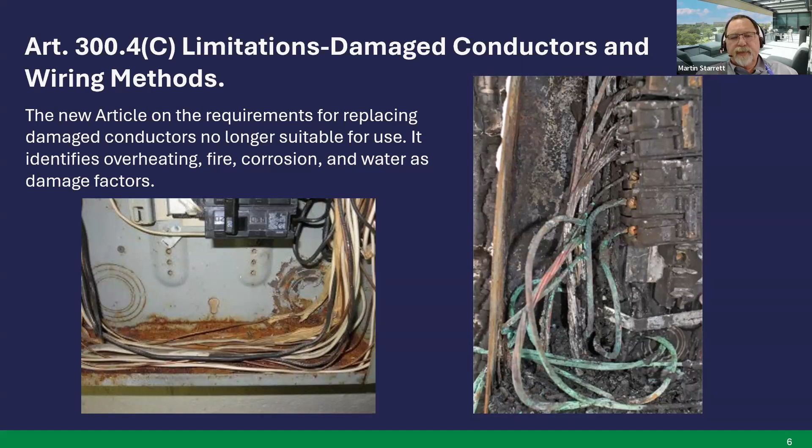Article 300.6E, protection against physical damage, wiring methods, material in or under roof decking. The revision has added all types of roof decking, not just metal corrugated. Those of you familiar with the 23 code or 20 code know that you have to maintain an inch and a half below a metal corrugated roof. Now in the 26, it'll be all types of roof decking, such as a residential. You have plywood. You'll have to keep those raceways an inch and a half below that.

There is a new exception for electrical wiring encased in at least 2 inches of concrete in concealed locations. And also there's always the exception for rigid and intermediate metal conduit. That still is in the 2026. Next slide.

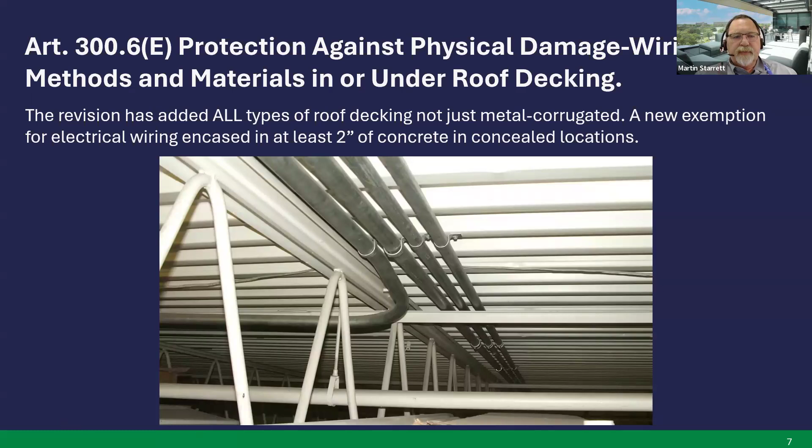Article 300.7D3, underground installations, protection from damage, service conductors, and raceway. The revised article now includes service conductors in raceways. As you know, the current 2023 and previous versions only talked about service cables. You had to put the warning ribbon above these ditches that had these service conductors. Now in 2026, if the service conductors are installed in a raceway, even then you're going to have to use that warning ribbon. Next slide.

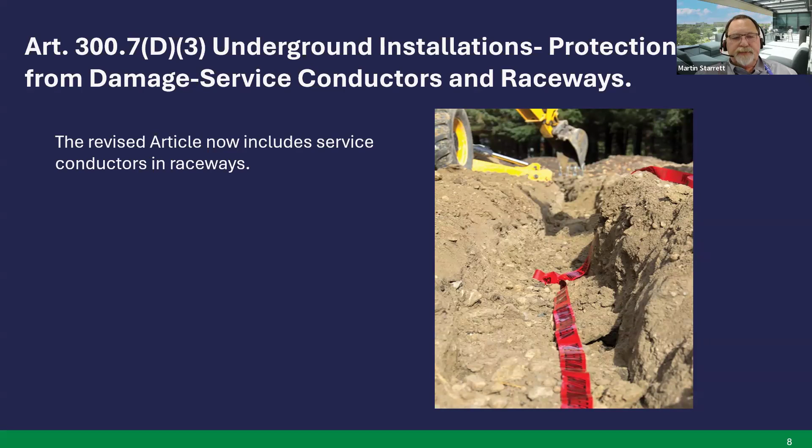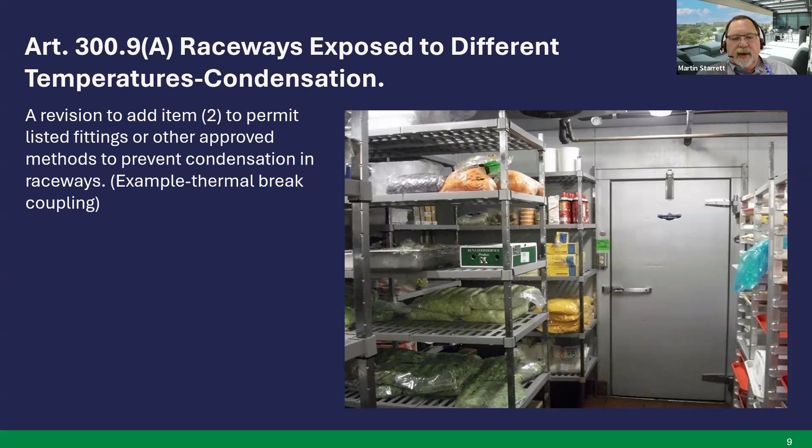Article 300.9A, raceways exposed to different temperatures, condensation. Revision to add item number 2 to permit listed fittings or other approved methods to prevent condensation in raceways. An example of what they've added would be something like a thermal break coupling. Typically, whenever you go from a cold temperature to a hot temperature, in the 23, you had to seal that. But now they've actually added another method in these thermal break couplings. Next slide.

Article 300.11B, raceways and wet locations above grade drainage. A new article requiring raceways to drain when installed in a wet location above grade. This would be interior and exterior. So if you have a wet location on the inside of a building, those raceways will have to be installed so they can drain. Next slide.

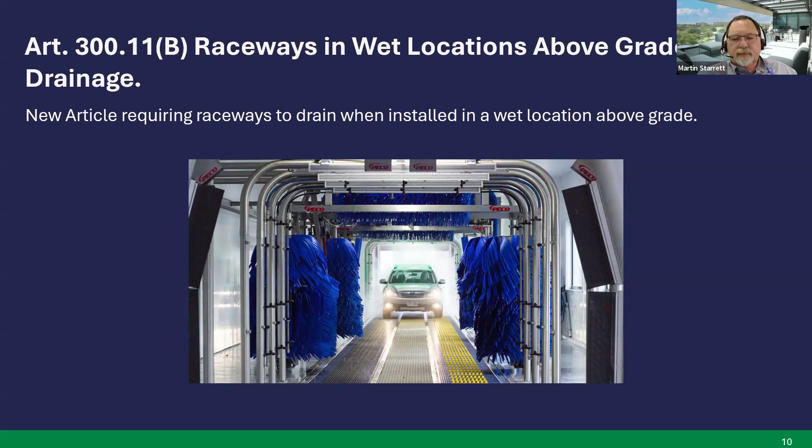Okay, this is kind of not a big one, but you're really going to have to pay attention, those of you that use cable ties for securing and supporting. So Article 300.13E, securing and supporting: the new subdivision and informational note utilize the new terms for cable ties and cable tie fixing device. If you were with me in chapter 1, those were new definitions added to Article 100.

So whenever you read this article, it tells you that the cable ties, if you're using them for cables and raceways, will have to be listed for securing and supporting. If you notice, I've got 3 different types of cable ties here. There's type 21S. That's only good for securing.

Type 21S, excuse me, the first one is 21S. That should be type 21. It's only good for securing. The middle one, type 21S, is for securing and supporting. And then, of course, you've got type AH2, plenum rated.

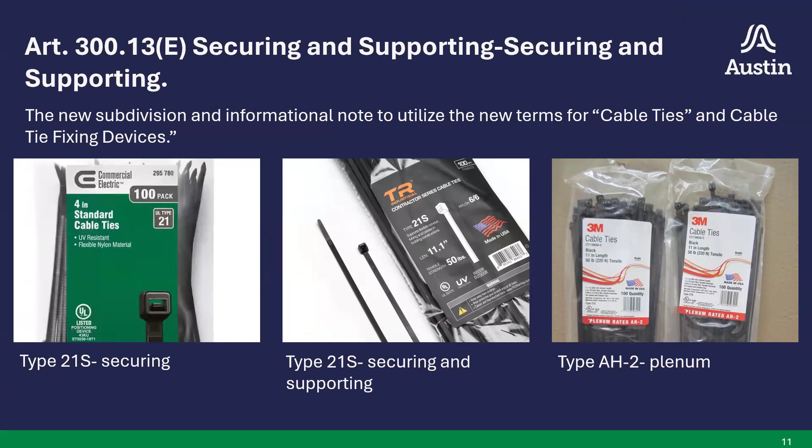Give me 1 second. I think we're having an audio issue here. Let me see if that helps. Hopefully that'll help. Marty, I think you're all right. I was just checking with the audience, and I think this may be just unique to one participant. Oh, good. You sound good to me. I was seeing chats come through. That's why I was asking.

Anyway, what I'm trying to tell you with this new article is, if you use cable ties for securing and supporting, you're really going to have to watch what you purchase. You're going to have to pay attention to the listing. As we've already talked about in the last 2 sessions, there's a lot more listing requirements in the 2026 code. Next slide.

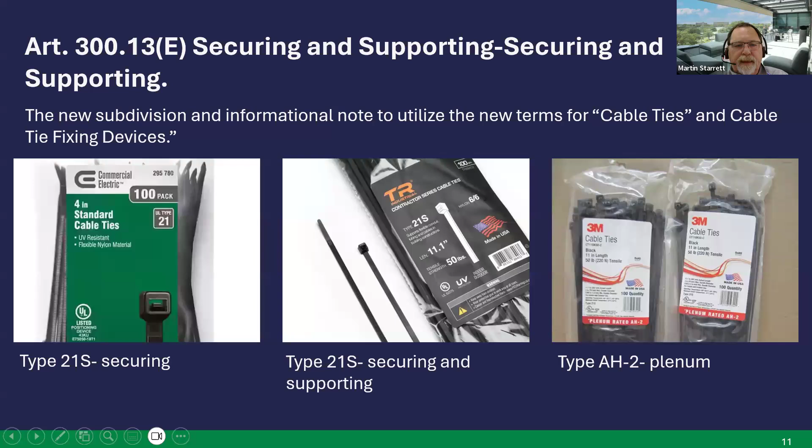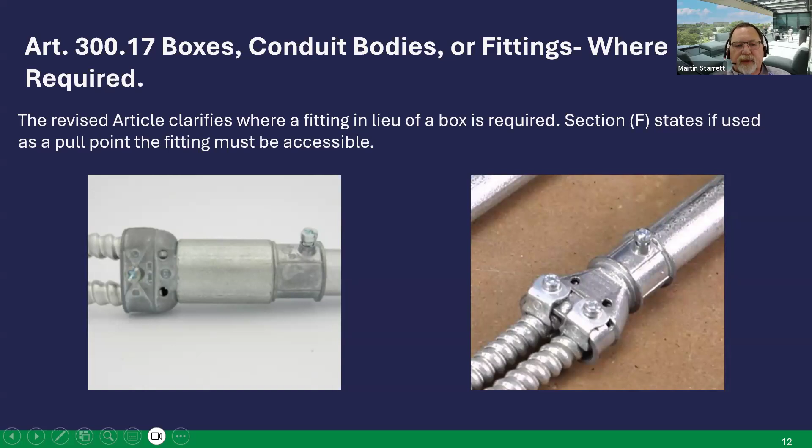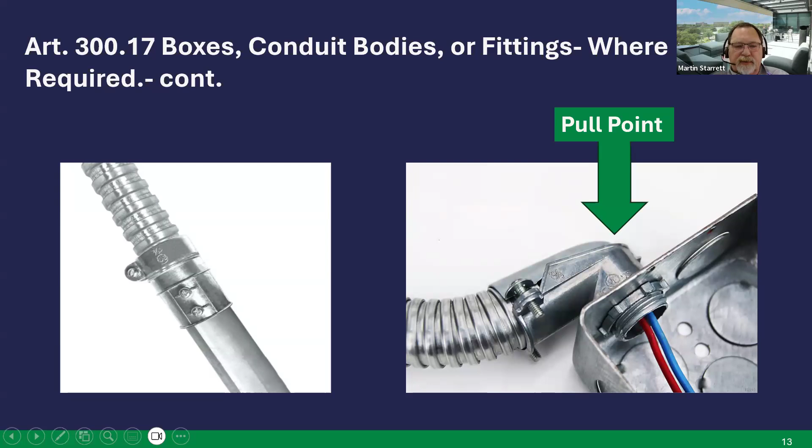So if you have a pull point in a raceway, you've got to have access to it. Like the one on the right, that 90-degree flex fitting, that's going to have to be accessible. The one on the left, since there's no pull point, you will not have to have accessibility to that fitting. Next slide.

Article 300.20(B), raceway installations, welding. The revision clarifies that welding of electrical raceways is not allowed. To be honest with you, you weren't allowed to do it for years, but apparently there was a little note in there that if an engineer could determine that it could be done, you could do that. But they specifically clarify it now. You cannot weld raceways at all. Can't even weld them as a support method. Next slide.

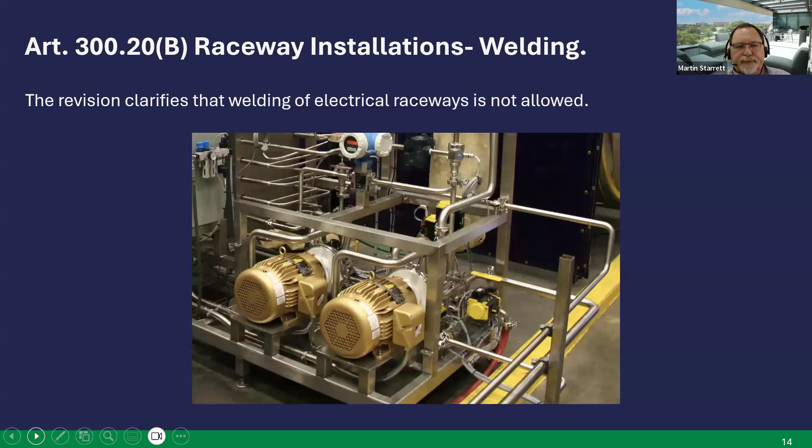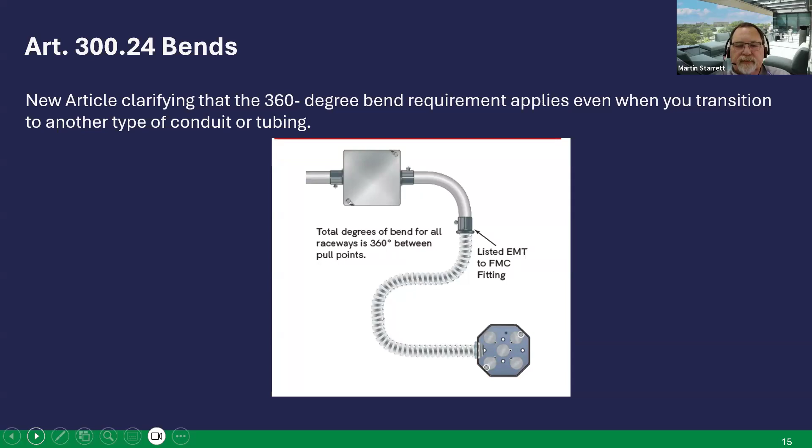Article 300.24, bends. The new article clarifies that the 360-degree bend requirement applies even when you transition to another type of conduit or tubing. So you'll really have to watch this if you go from EMT to flexible metallic conduit. You'll have to look at your bends. You will not be able to have more than 360 degrees between two boxes. Next slide.

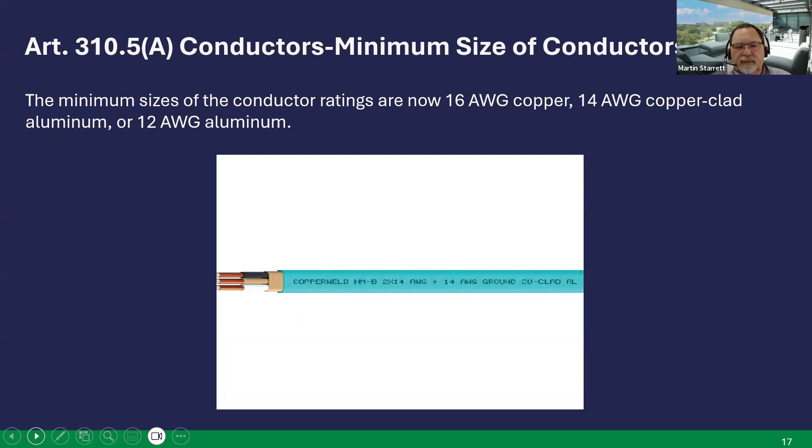All right, now we're going to get into Article 310. That's conductors for general wiring. So Article 310.5A, conductors, minimum size of conductors. We have a new minimum size now in the National Electrical Code. It'll be 16 copper. If you were with me on Friday, we talked about that 10 amp branch circuit; you'll be able to use that 16 copper or the 14 gauge copper clad aluminum for those types of circuits. Next slide.

Article 310.14(A)(2), ampacities for conductors rated 0 volts to 2000 volts, general selection of ampacities. The exception to this article has been rewritten as a list and clarified. It now clearly states that the higher ampacity can only be used when differences are caused by ambient temperature or the number of current carrying conductors. The part of the circuit with the lower ampacity still cannot be longer than 10 feet or 10% of the total circuit length.

So most of you are familiar with doing ampacity when you do adjustments. If you've got a certain section that's in an ambient temperature area, or there's more than 3 current carrying conductors, typically you would have to do those adjustments along the entire length of the circuit. But if that particular area where that occurs is not longer than 10 feet or 10% of the total circuit length, then you don't have to do the ambient temperatures for the whole circuit.

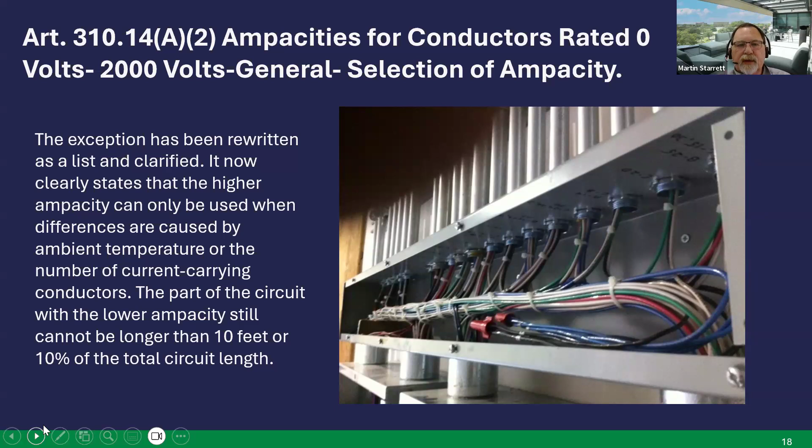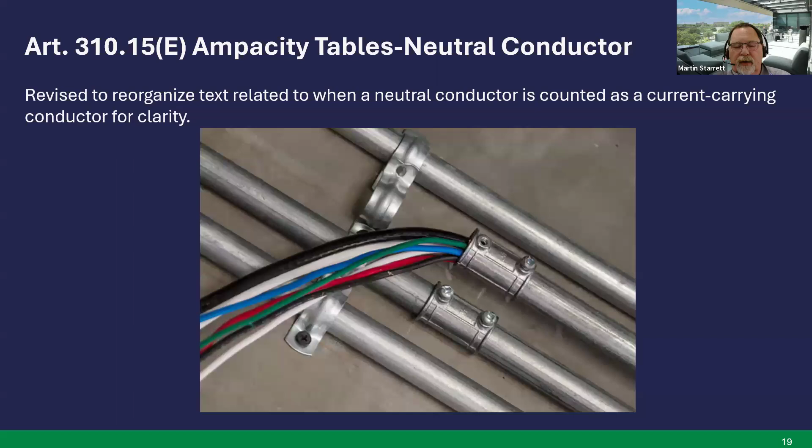Article 310.15(E), ampacity tables, neutral conductor. They revised it to reorganize the text related to when a neutral conductor is counted as a current carrying conductor for clarity. I'll be honest with you, this new revision has clarified it for me. I know throughout the years I've always had a little issue with this particular article, but now the 2026 is going to make it easier to understand. Good code change.

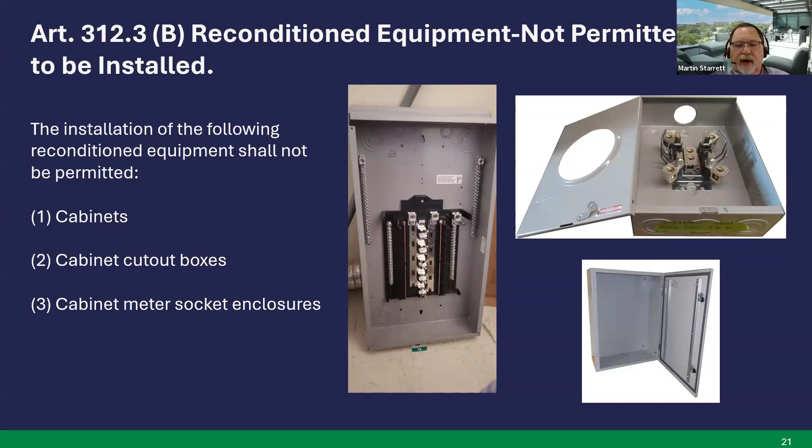Article 312, cabinets, cutout boxes, and meter socket enclosures. Next slide. Article 312.3(B), reconditioned equipment not permitted to be installed. As we've been talking the last two sessions, that .3 is your reconditioned equipment, pretty much in every article that has that requirement. This one says that you're not permitted to use reconditioned cabinets, cutout boxes, or meter socket enclosures. Next slide.

Article 312.11(A), splices, taps, and feed-through conductors. This is a big change if you do a lot of these generator installations on existing dwellings. I know because of the way it works out on some of these houses, you have to put in the transfer switch for the entire house generator for protection.

You've been able to run the load side conductors off of the meter through the existing panel to the new service rated transfer switch, but you cannot do that in 2026 because the revision, service conductors are to be located within service equipment, was added to the required conditions. So you will not be able to run those service conductors through that existing panel in the 2026.

You will have to reconfigure your installation to go from the meter over to the transfer switch, and then from the transfer switch back to the existing panel. So you really have to watch that if you do this type of installation. Next slide.

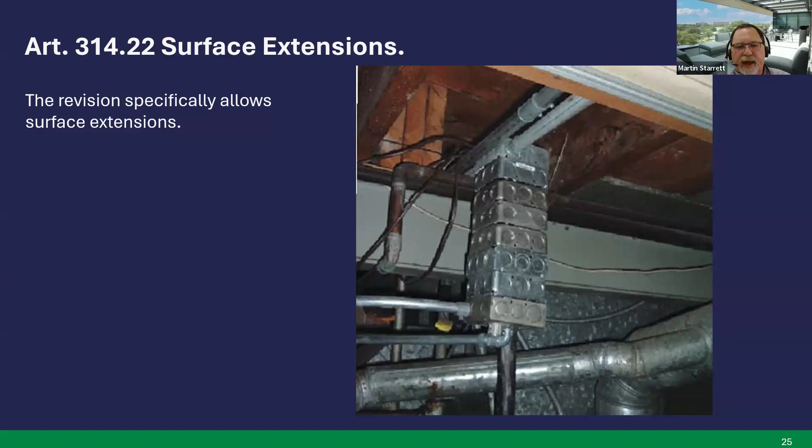I think this is a pretty good one myself. 314.23(E), supports for boxes and conduit bodies. This one here is raceway supported enclosures without devices or luminaires. So it'd be like if you had a junction box with no receptacles or lights attached to it. The revised exception added FS or FD single gang box or explosionproof box to what is allowed to be supported by a single raceway.

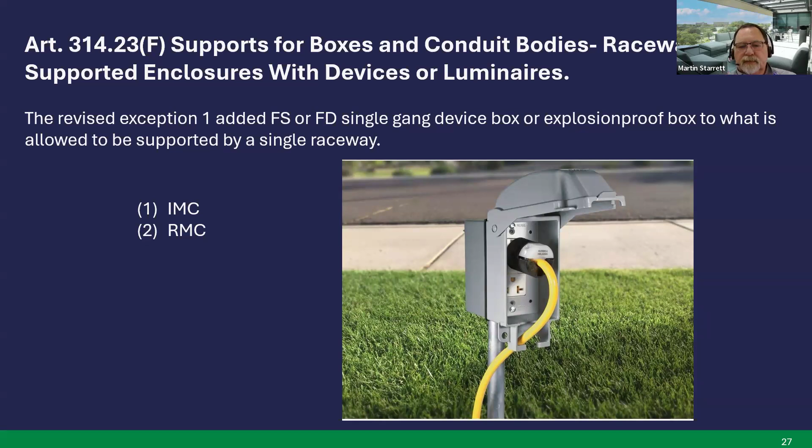This is my most favorite code change of 2026. As inspector, the current code requirements, well, it wasn't difficult to enforce, but it was kind of one of those things like, oh man, I hate doing this. I hate failing people for it. But now we've got it clarified and it's exactly the way it needs to be to me.

Article 314.27(B)(2), boxes at ceiling suspended paddle fan outlets. The new required locations for ceiling fan boxes is either one, centrally in ceilings of living and sleeping areas, or two, at locations where indicated by the installer, designer, or building owner. If you were not familiar with what's currently in the code, the ceiling fan boxes are required in habitable rooms where you could put a ceiling fan.

What that means is if I've got a kitchen, if I've got lights over a kitchen island, even those are places that typically you would not see a ceiling fan, but current code, I'd have to put a ceiling fan rated box in those areas. The new 2026 code, I think it gets it right. You're just going to be putting these boxes in the living and sleeping area. That's where most people have their fans in a dwelling unit. Or hey, if the owner wants to put a fan in the dining room, then you would have to have a box there, but not every box in every room of a house.

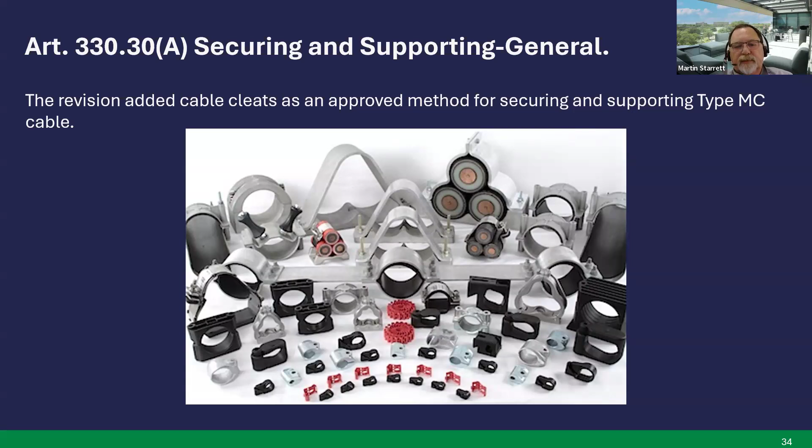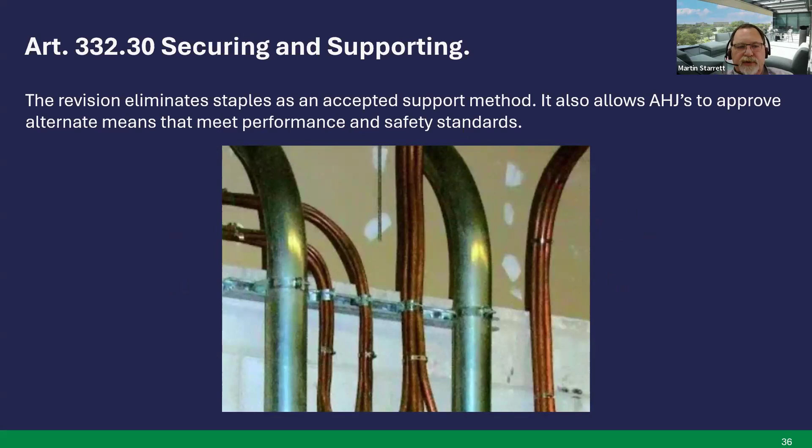Article 332, mineral insulated metal sheathed cable type MI. Next slide. For securing and supporting, Article 332.30, the revision eliminates staples as an accepted support method. It also allows the AHJs to approve alternate means that meet performance and safety standards. So you will not be able to use staples to support MI cable.

Article 334, non-metallic sheath cable types NM and NMC. Next slide. Article 334.10, uses permitted. The revision added an exception to allow NM cable to be installed without the 15-minute thermal barrier in non-habitable grade level storage garages and buildings under 1,500 square feet. I will say electricians will need to watch that.

You cannot put NM cable where areas are subject to physical damage. Sometimes these little garages, for tool storage or tools, they might actually damage the cable. But the new code, you do not have to have the 15-minute thermal barrier. Next slide.

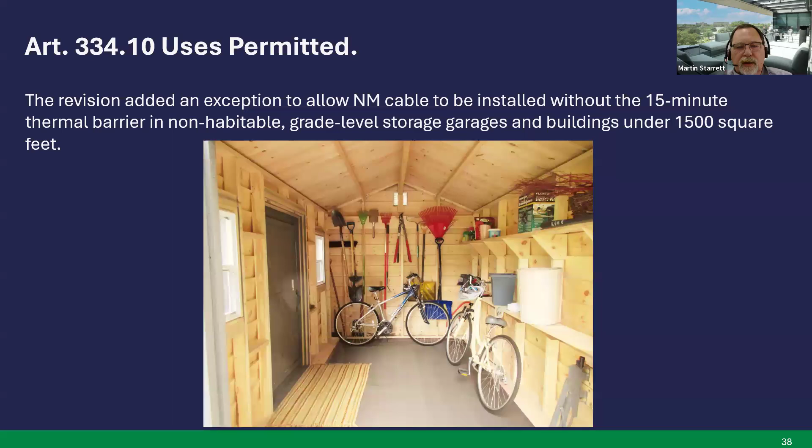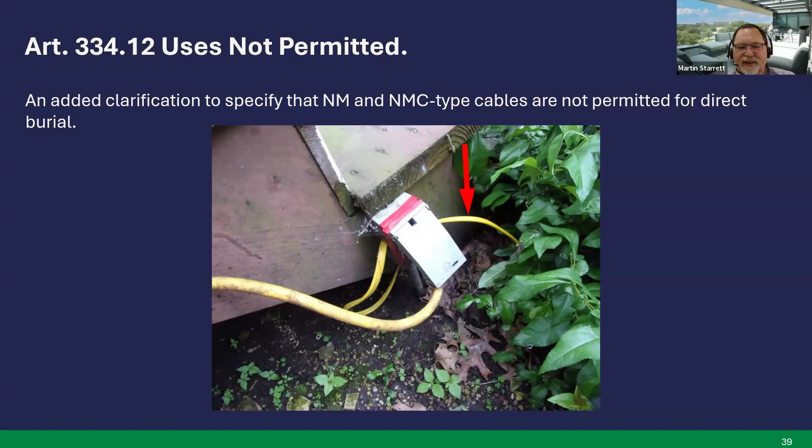Article 334.12, uses not permitted. They added a clarification to specify that NM and NMC type cables are not permitted for direct burial. I always thought this for years, but I guess it wasn't ever really specified in the code. There were probably some little discussions amongst installers and inspectors, and so they actually put it in the code. It says you cannot direct bury NM or NMC type cables. No digging Romex underground. Next slide.

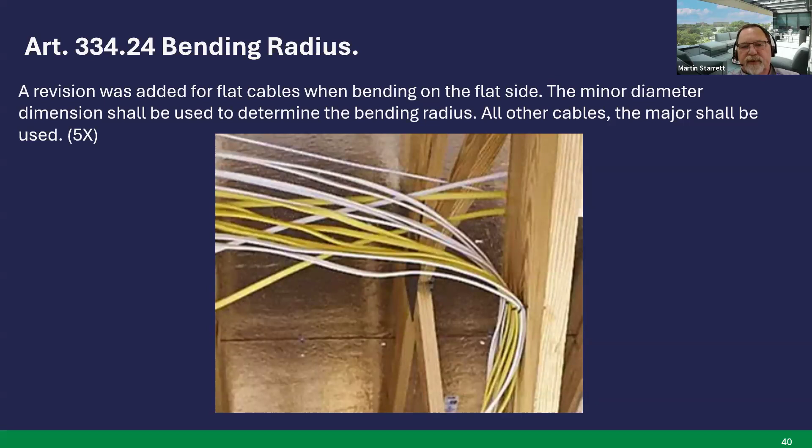A few changes to the bending radius, 334.24. A revision was added for flat cables when bending on the flat side. The minor diameter dimension shall be used to determine the bending radius. All other cables, the major shall be used. If you do not know, the bending radius on a Romex is 5 times the diameter of the cable. So they give you a little bit more bending radius on the flat cables than on a non-flat cable. Next slide.

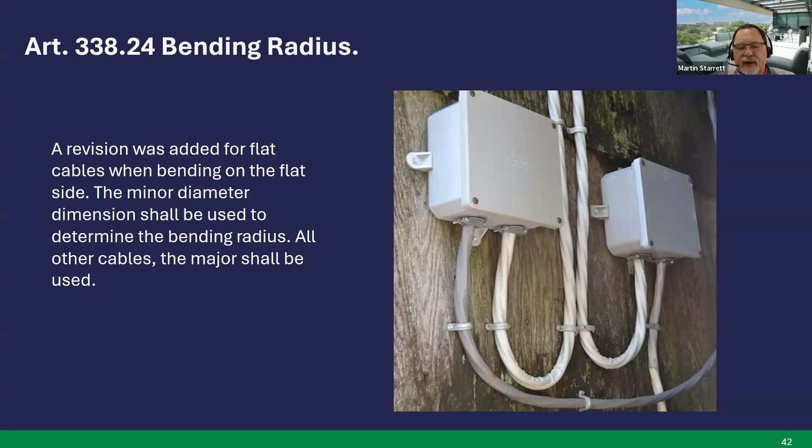Article 338, service entrance cable. This will be types SE and USE. Next slide. Same thing, just as just discussed in the NM and NMC article, same thing in the SE and USE article. The revision to 338.24 bending radius was added for flat cables. The minor diameter dimension shall be used to determine the bending radius. All other cables, the major shall be used. Again, 5 times the diameter size of the cable. Next slide.

Article 342, intermediate metal conduit, IMC. Next slide. 342.10(B), uses permitted, corrosive environments. A new informational note was included to provide examples of corrosion protected wiring methods. These two are galvanized steel and PVC coated steel. Next slide.

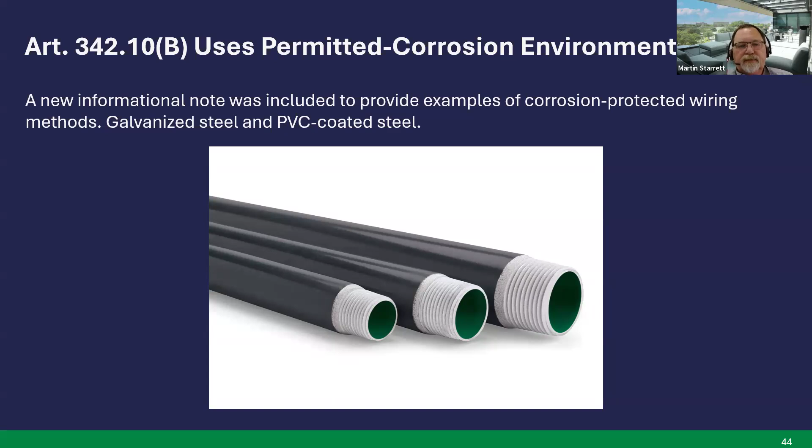Article 342.14, dissimilar metals. This is the same article that's also in rigid metal conduit, 344.14. I'm kind of doing two birds with one stone here. A new list item 5 is added to permit the use of identified bimetallic couplings as a method to prevent galvanic corrosion when joining dissimilar metals. So they've added these to both the .14 articles in intermediate metal and rigid metal conduits. Next slide.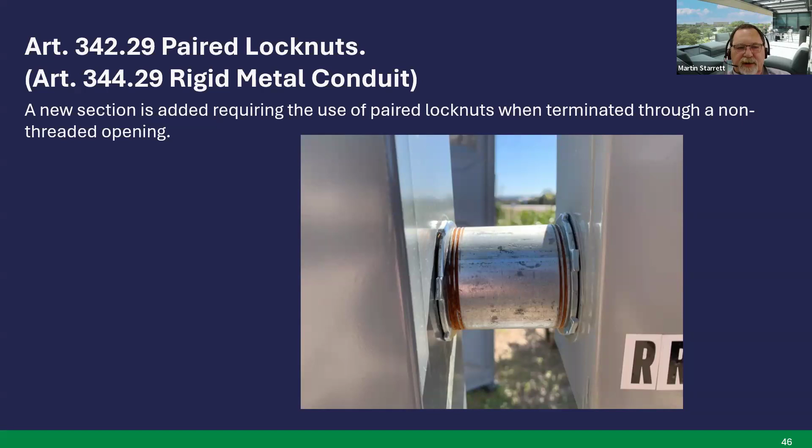There you go. Thank you.

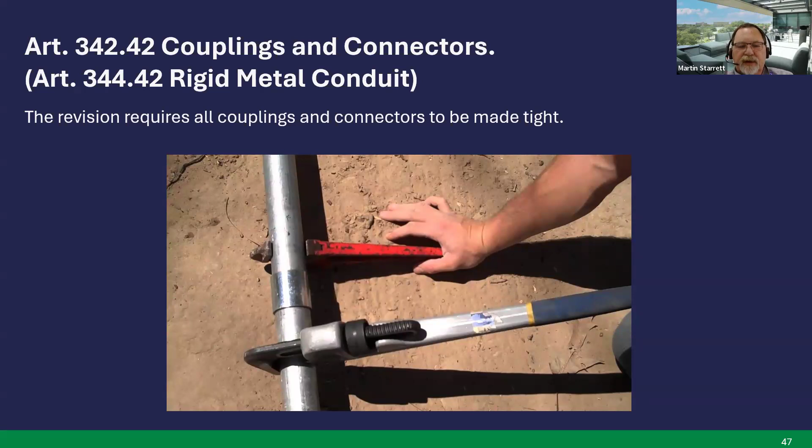Article 342.42, couplings and connectors. It's the same in rigid metal conduit, 344.42. Again, here's another one. The revision requires all couplings and connectors to be made tight. So it actually has to spell it out. We've always known this, but it wasn't really, I guess, clear enough in the code. Now it will be. They have to be made tight.

Article 352, rigid polyvinyl chloride conduit, PVC. Next slide. On 352.20(B), maximum size, the new exception allows for sizes larger than number 6 if conditions are met, and the condition is underground. So you can actually go larger than number 6 PVC underground. Next slide.

Cable trays, Article 392. Article 392.18(F), cable tray installation access. The revision introduces a new requirement for at least 12 inches of access clearance above cable trays. They needed this one. There are 4 exceptions, though, that were added that provide flexibility in specialized environments, such as areas with limited space and IT rooms.

I will say that also one of those exceptions is where you've got an industrial type place where you've got continuous maintenance. You can actually go less than that, but this was a good one. Next slide.

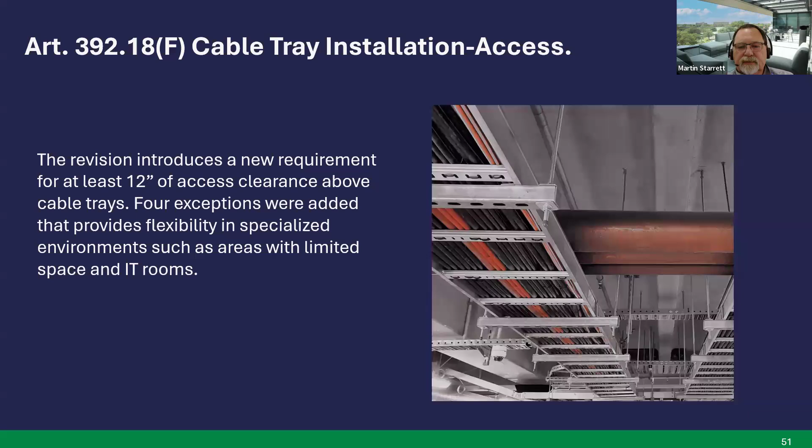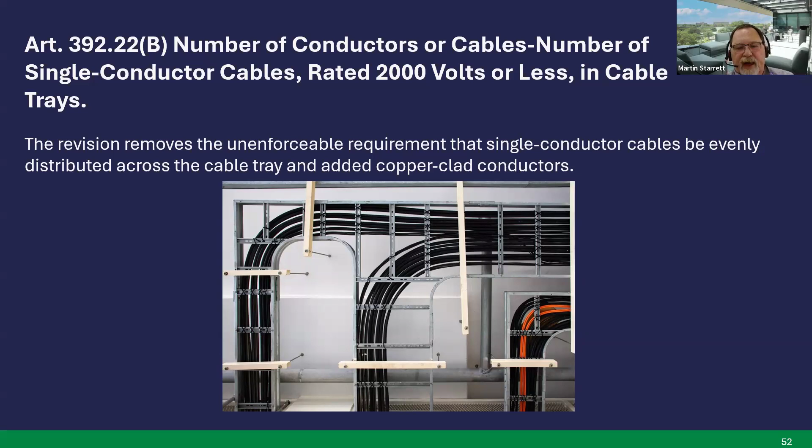Article 392.22B, number of conductors cables, number of single conductor cables rated 2,000 volts or less in cable trays. The revision removes the unenforceable requirements that single conductor cables be evenly distributed across the cable tray, and they also added the use of copper clad conductors. So there was already a requirement in the code, but it was unenforceable. So they've actually cleaned this up to help with that.

Next slide. Article 393, low voltage suspended ceiling power distribution systems. In Article 393.14A, installation general requirements. The revision removed the phrase installed in a neat and workmanlike manner, and they included new language that requires a qualified person to install all components of the system. So you'll have to be qualified, trained to install these particular types of systems.

All right, so that's pretty much the changes for Chapter 3. Looking ahead, I'll be doing the Chapter 4 changes on Friday. If you need additional resources, there's a lot of stuff that's available on YouTube. Ryan Jackson is a good one. He's doing 100 days of 100 code changes on his. The IAEI has got some stuff on their web channel too for code changes. And then also the National Electric Code itself has those. So I would recommend if you need any further information on the ones I went over today, you might look at those or maybe even read up on some of the articles that some of the trade magazines put out.

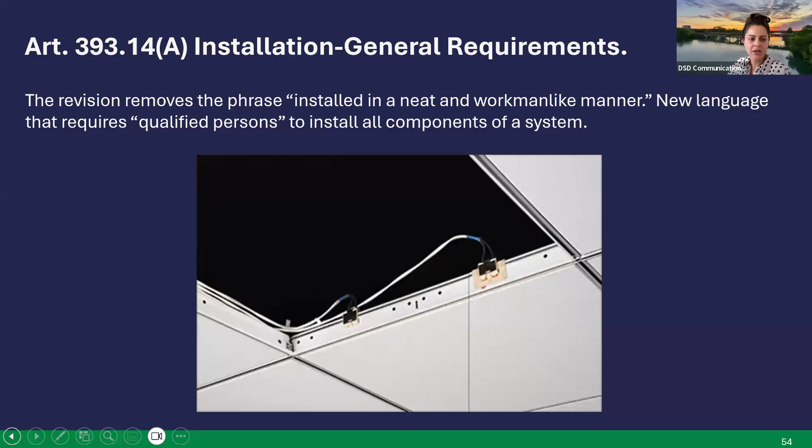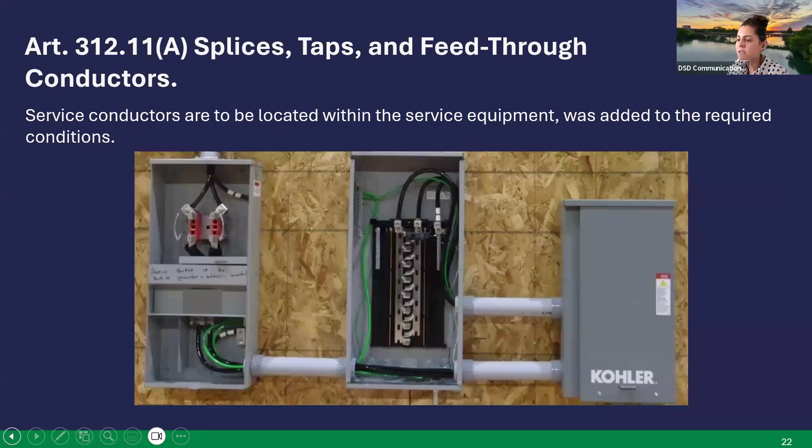But to get us started, I'll read the first question we've got from Dan. It says, regarding 314.23E, possibly slide 26. I'm going to try and go back to that. Let's see. We've covered a lot of ground. They are speaking of Schedule 80 PVC for support and not Schedule 40. Is that correct? Let's see, we said slide 26. So I don't think that's the one.

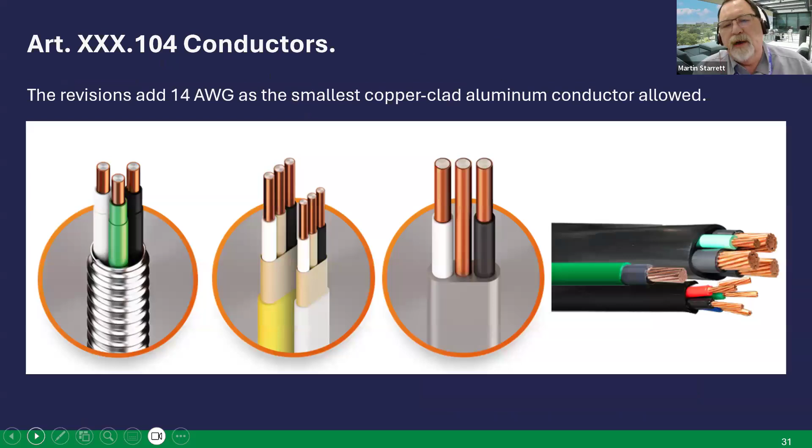Dan, I don't believe they actually call out the Schedule 80 or the Schedule 40. I think they just say rigid PVC. I'll have to find out additionally on that for you, but I don't think they actually call out which schedule to use. I think what Dan is talking about here, typically Schedule 80 conduit is used for areas subject to physical damage. And I think what he's thinking about, I would think the same thing, is typically you see these installations in an area that possibly could be subject to physical damage, but I can't answer that right today. I'll have to get back on that, but I do not think they actually call out what schedule you have to use. I think it just says rigid PVC.